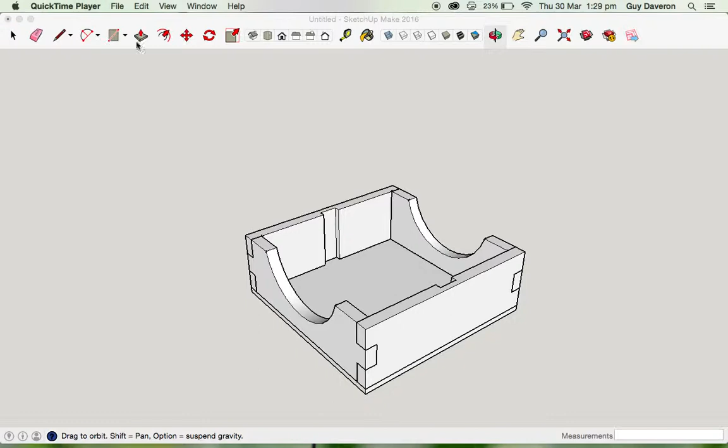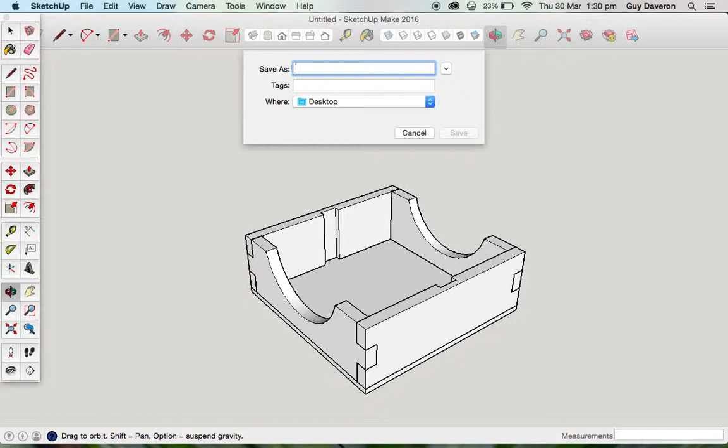The first step you need to do, since this is the original drawing and once we change it you can't get back to it, is to go Save a Copy As. This one was called napkin box, but I'll call it napkin holder ortho, and save it on the desktop there.

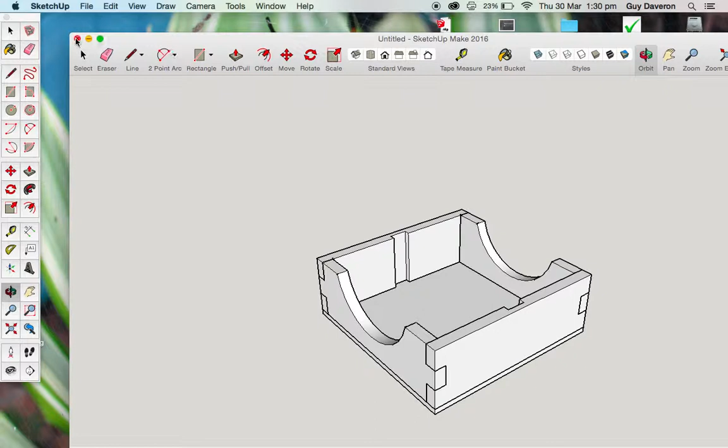This is still the original drawing I've done, so I'll close that and have a look on your desktop. There it is, the napkin holder ortho. Open that one up. Orthoo, that's no good - I was in a rush with the O's. Anyway, I won't worry about that now.

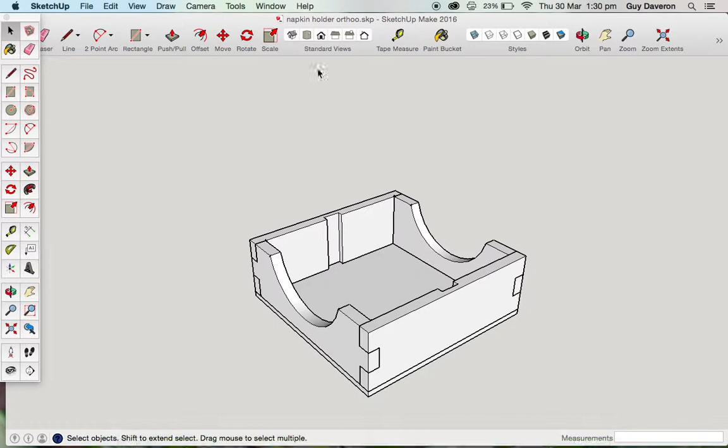Now we're going to go to Window, Styles, and change it to this style that doesn't have the texture on it and has a white background. Then when you put your orthographic drawing into your folio, it'll fit more neatly and won't have that grey background behind it. So that's that, we're in the right area now.

Now I'm going to turn off those axes, so go to View and Axes and turn those off. Hopefully you've got these up the top of yours - if not, remember View, customize the toolbar, and you can drag those up. If you've got a PC it's a different way, and I can explain that to you later, I can't show it here obviously.

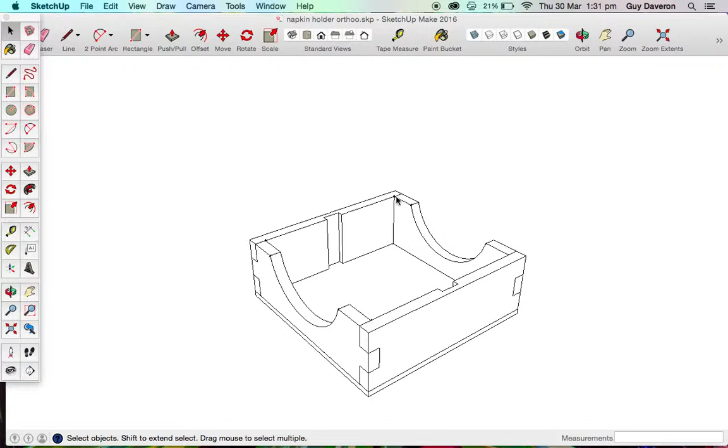Now I'm going to go to one of my standard views and just click through these three. That is the one I want to have as a front view, the middle one. Now as you see, that one at the back is smaller, and that's because it's in perspective.

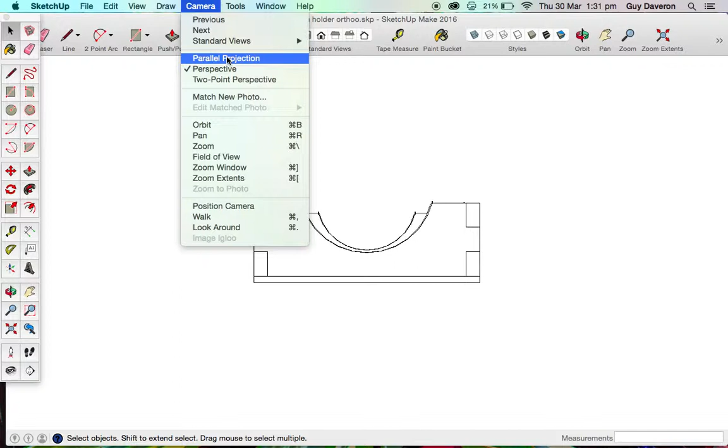So you need to go to Camera, and at the moment you can see it's in perspective - that's been highlighted. So you turn that to parallel projection, and watch what happens - you just get a single line through it.

The other thing I'm going to turn on now is this one under Styles. As you click that on, you can see these broken lines come on - that's the hidden detail for the bits that you can't see through the wood. Okay, so I'm ready to go.

I'll just pan that down, put that down the bottom. Now I've got to make sure this thing - I was going to make sure the whole thing is a group, but the base is not connected. So we'll just make another group, Command G, and now the base is connected.

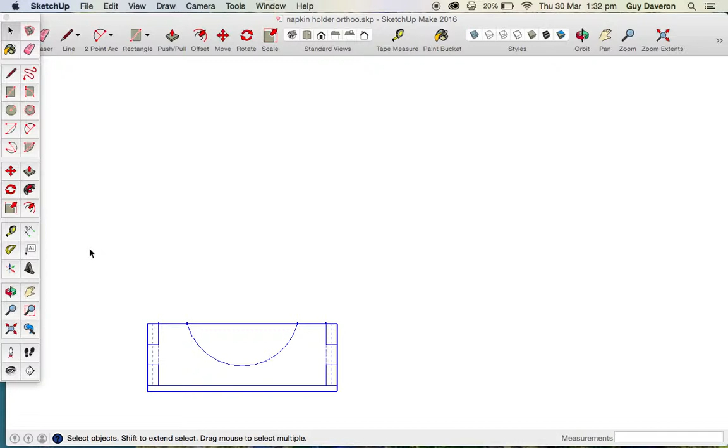Now I'm going to move that copy, pushing the Option button, straight above it, making sure that line is on the axis as it shows there. And I'm going to make another copy of this one to the side - so move, Option, to the side.

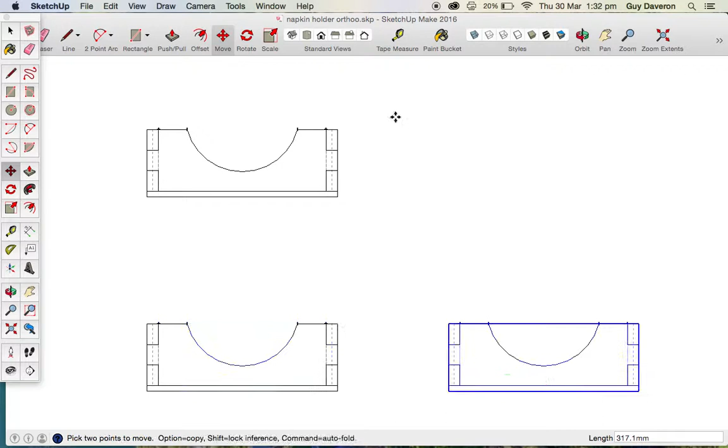Right up. Now we go to this isometric view. This is where it gets a bit tricky, but anyway.

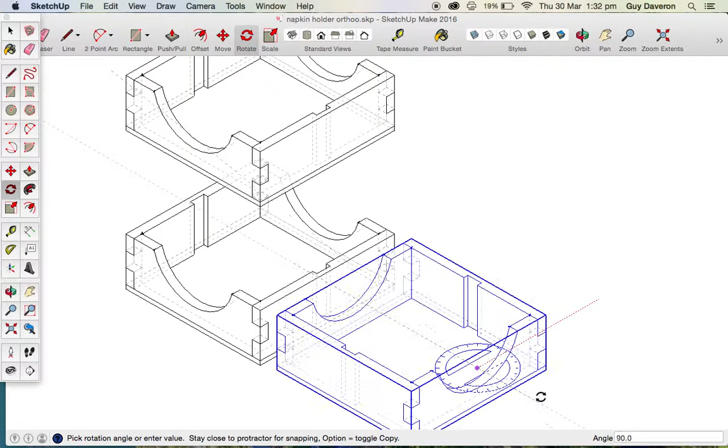What I want to do is rotate this one that's highlighted at the moment on that blue set of angles. So click it, then move it out and click it again and swing it around 90 degrees. Now it's pretty close there to the other view, but that doesn't matter. You can see on the bottom right hand side, that's the 90 degrees. So I click again, that's in place.

This one I want to rotate 90 degrees in the other angle, so this time it's the green one that I want. Click, bring it out, click, swing it around, and then click again.

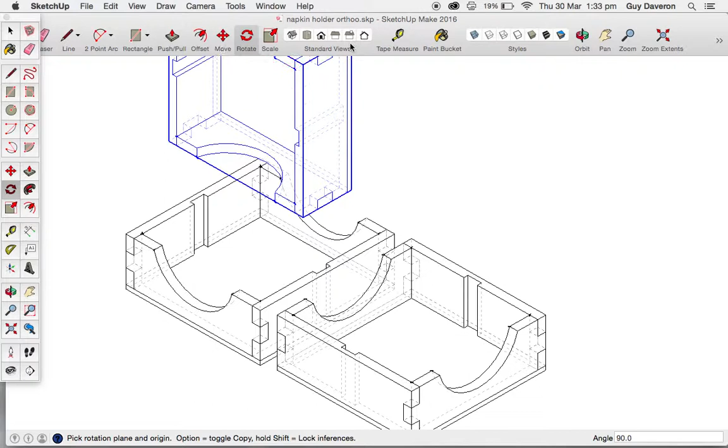Now when we come back to this one, which was the view that we started with, you can see that there are your three views.

Now I might just move this one a little bit lower, making sure it stays on that line - don't let it go sideways. And then the side view, I'm just going to move that a little bit to the side, just to give me a little more room. Okay, so that looks fine.

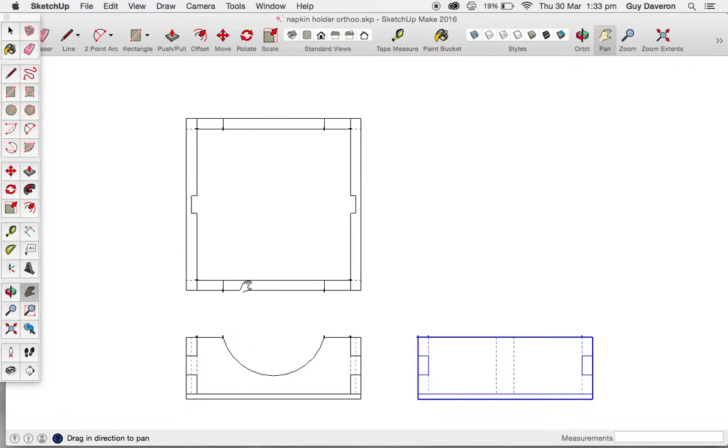Now once we've got to this stage, you don't want to start zooming in and out because the dimensions change a little bit. So it's best to get this in a position now and just leave it - that'll be the final position, and that's the way it'll be when I take my screenshot. So firstly, dimensions.

So you can see which tool I use there, I hope. Put this one here, and I'm just going to get these on very quickly.

For an orthographic drawing, you should have all of the dimensions on there. It shows everything so that the person making it knows exactly what size everything is. So I'll put quite a few on. Now it's important to have these ones too.

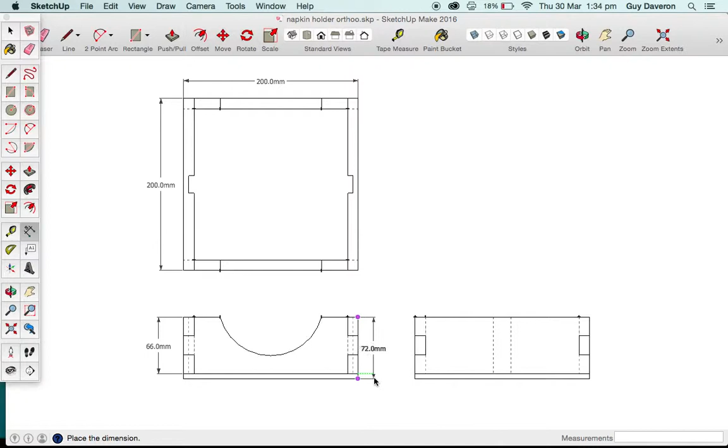And if you remember on the last drawing I said make it 66 rather than 65, well this is why - so you get three lots of 22 rather than 21 and a third.

That's right. And there, okay. And bring that out. Okay, so now, no, I must have missed that one, so it's got 21.

The computer's playing up a little bit. Anyway, I won't waste time trying to sort out why. I'll leave that there for now, but that should be a 22, and my computer's mouse is playing up a little bit.

The other one I need to have is probably this one from there to there, because that's an important measurement, 30. And the last one, I'll put that from there to there.

Now see when you're putting it on, that can go at that angle, but you just got to move the cursor down and it'll straighten up for you. Right, so that will do.

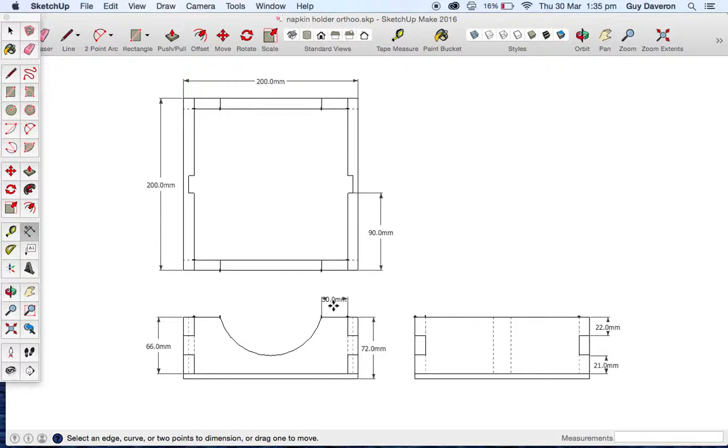You notice that it's got 90.0 millimeters. Down on this one, you can't even see it because it's all cluttered up with different bits and pieces. So we can change that.

This is where we go to Window, Model Info, Units, and at the moment the precision is 0.0 millimeters. So we change that to 0. And also it says display the unit format, which is millimeters, but we don't need that, so we'll turn that off.

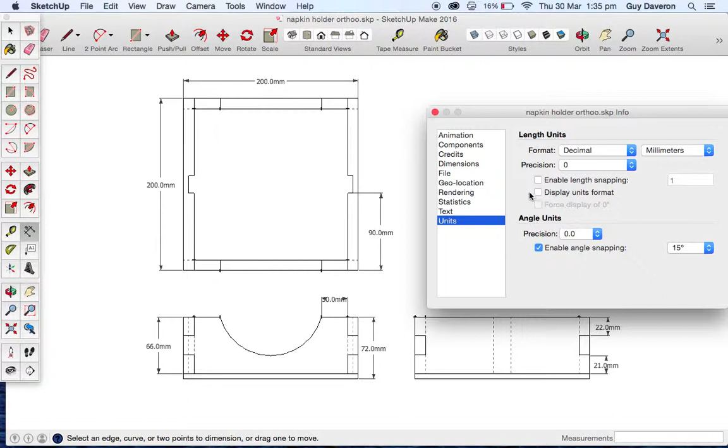Nothing changed, because now we go to dimensions. We say select all and update. Oh, well, they updated straight away anyway. So there it is now.

Now you can see that's much better in that you can see all the numbers. But see the 22 and the 21, they're a bit tight.

Another thing you can do, the endpoints in here, you can turn those to dots, so see what happens there. Then we go select and update. See they turn to dots, so those numbers become clearer.

So there's a few options there and you want to play with them. I might just leave it as the slash. But they're all good, they all look fine. And it's better to have them consistent across the drawing rather than having one dimension having something and the others like that. Okay, but that's all good.

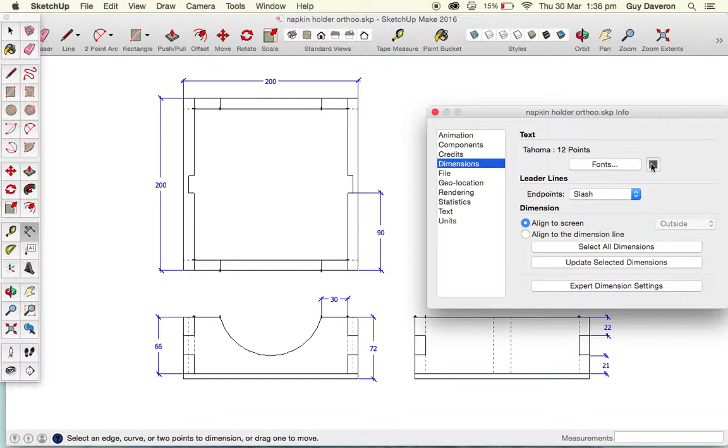The only other thing, if I've got my dimensions, I'm going to change the text color, and I'll pick another color that will stand out so that the drawing stands out. I'll pick that purpley looking colour. Once again we go select and update.

Now you notice that they haven't changed, and that's because nothing is selected. Now it is - that's changed now. So we've got those purple ones. That looks okay, that drawing is just about done.

It's got the hidden detail here, it's got the dimensions. The only thing missing are the subtitles.

So that's the top view, and the front view. The front view and the top view always line up, so the top view is above the front view. That makes this one the side view.

And well, I'll put the right side view - sometimes you have two views, the left and the right, but I'll put that in. Right side view, enter that. That's done, that drawing is now complete.

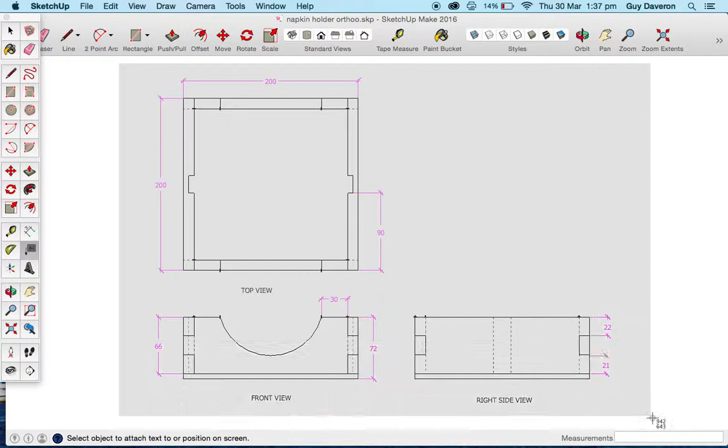What you can then do is go Command-Shift-4, or if it's a PC, something different. Right, take your screenshot, that will then be on your desktop.

Really see this is how slow it's going. Okay, and there it is. You can then copy and paste that straight into your design folio.